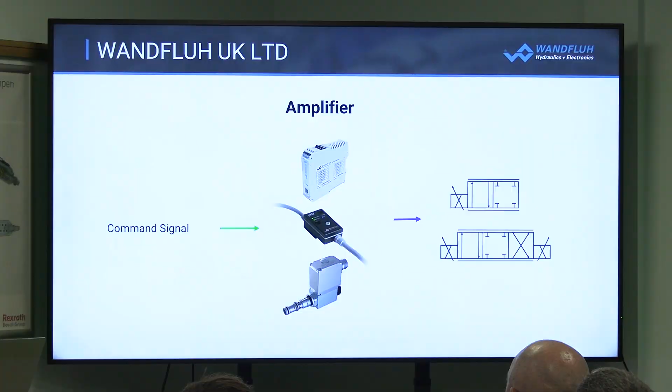So amplifiers do what they say. They just take like a command signal. So it could be a 4 to 20 milliamp or a 0 to 10 volts, and they do some conditioning to it and then send it out to your proportional solenoids. And the amplifier will send out what's called a PWM, pulse width modulated signal. This is to actually vibrate the proportional valve. So most proportional valves are vibrated to overcome the stiction.

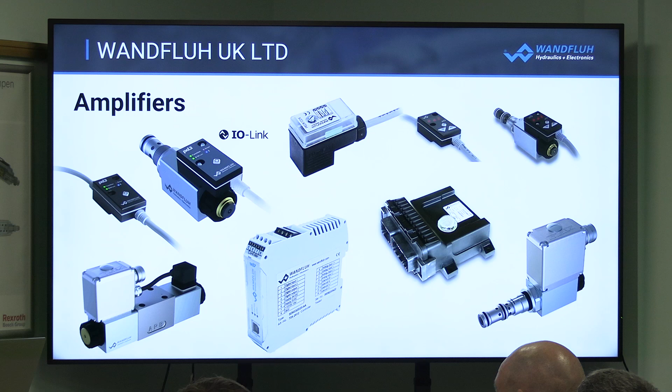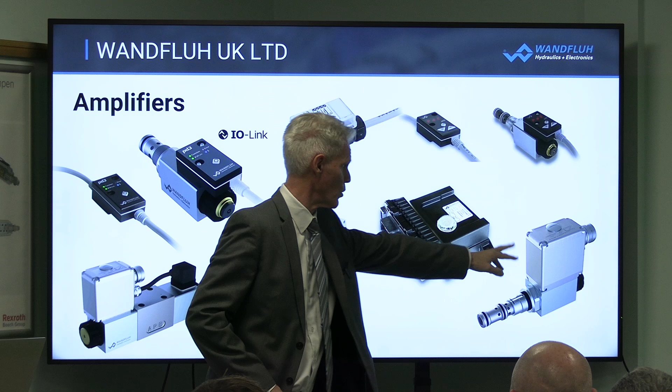So this is what hydraulic amplifiers look like. Nothing fantastic. So basically, we can have them mounted on the solenoid on the valve. We can have them freestanding, DIN rail mounted, bolted to some steel, more complicated ones on the valves.

The freestanding ones we can use to control virtually anybody's proportional valve. I've been with Wandfluh nearly 20 years, and I have not come across a proportional valve that I can't control with this range. Until tomorrow, when somebody comes up with one.

Closed loop controllers, as they say, we call them controllers, they're for closed loop control. So all this does is take a command signal coming into the electronics and compares it with a feedback signal from an actuator, for this example, and matches the two, and it will decide what it sends to the various coils on the valve.

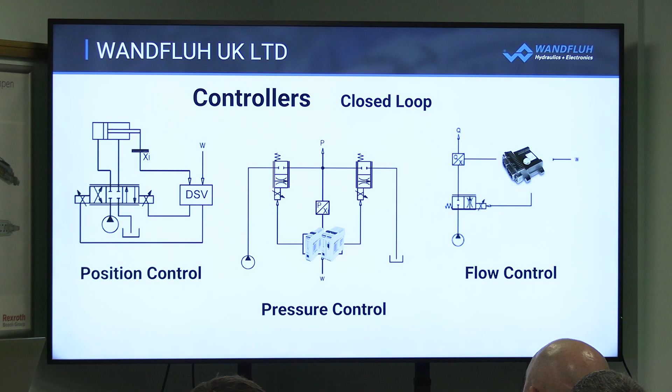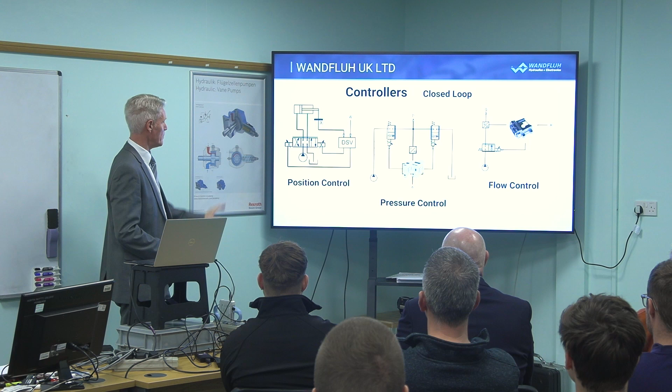You've also got, obviously, pressure control, flow control, but it has a feedback. So if a transducer, you have a flow meter, that goes back into the electronics, and that decides then what to do, so it matches the feedback to the command signal. Controllers look remarkably like amplifiers. They're all in similar sort of enclosures, but they do have the ability to put a feedback into them.

All the Wandfluh electronics, except for one, but that's an analog one, the digital ones are all based on PASO. This is a picture of the basic PASO software. You can download this from the Wandfluh website anytime you like. It's free of charge. So all this is doing is taking your command signal, putting it through conditioning, and sending it out to your solenoids.

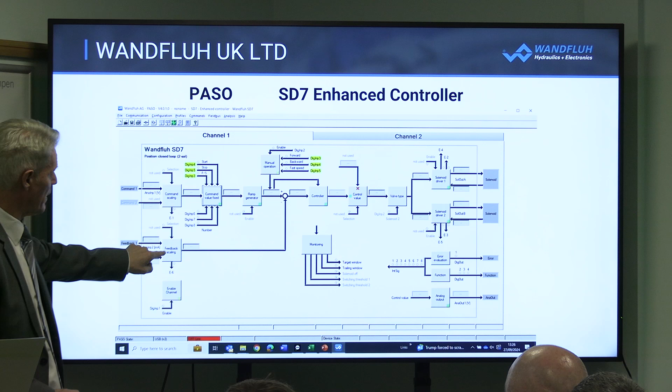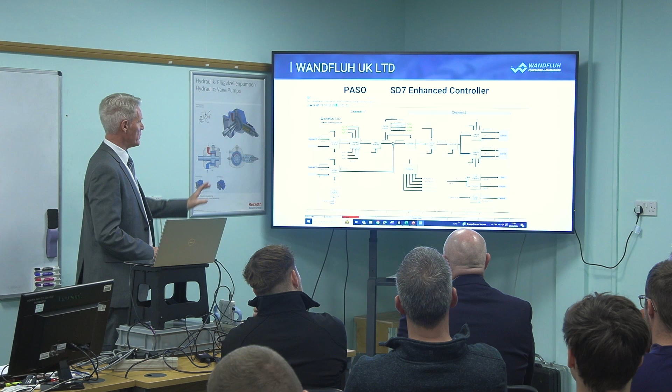And a controller does the same thing, takes your command signal, but it compares it with your feedback signal and then decides what to do about it to send it out to your various solenoids. Generally speaking, when you're using the controllers and the amplifiers, you will need a laptop to go into it, except for these ones here. So this is what we call a PD3. This is this little animal here. And you use your mobile phone for that one.

So you download the Wandfluh app, which I guess all you guys have done. Yeah? You all got the Wandfluh app? You've looked at it this morning? Yeah? Before you get out of bed? Good, I'm glad to hear it.

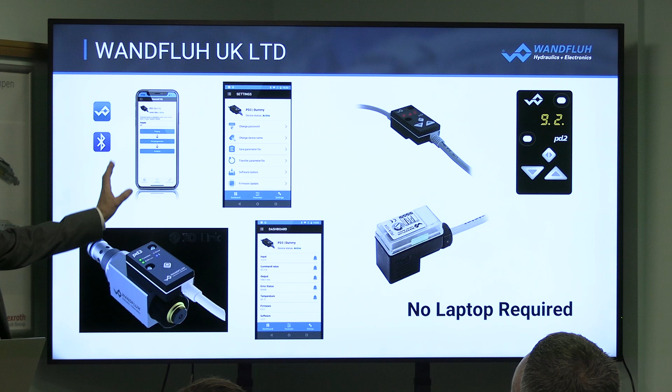You basically can connect up. This is probably the latest one we've got. So this allows you to have a look what's happening in the amplifier, and also you can change settings with the phone. The PD2 is a nice one. It just gives you a little bit of a display, so you can see what is happening with the amplifier, what signal's going into it, what signal's coming out. And for the guys that like it, this is a PO2, and this uses a screwdriver to basically change the settings.

If you've got any questions while we're going along, just ask them as we're going along.

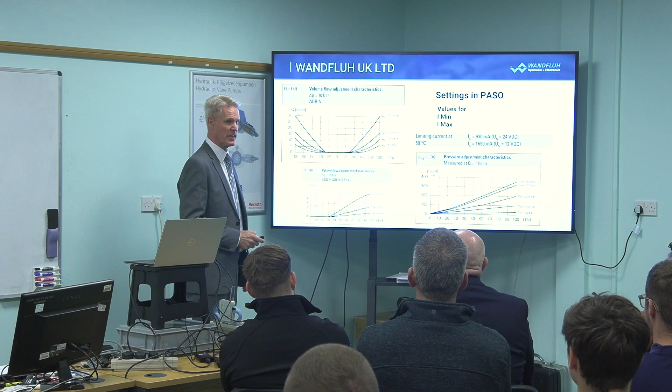So when you're looking at controlling a proportional valve, when you look at the proportional valve's data sheet, there are certain things which you need to know or need to look at. First thing is what is the maximum current going to your proportional valve. We look at what we call I min and I max. So the maximum current that we can send to this proportional valve is 930 milliamps. Proportional valves also have quite a large deadband if you're using like a directional control valve, like a 4-3 spool valve.

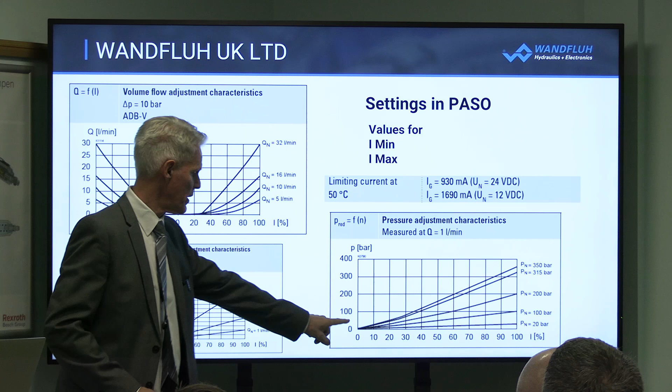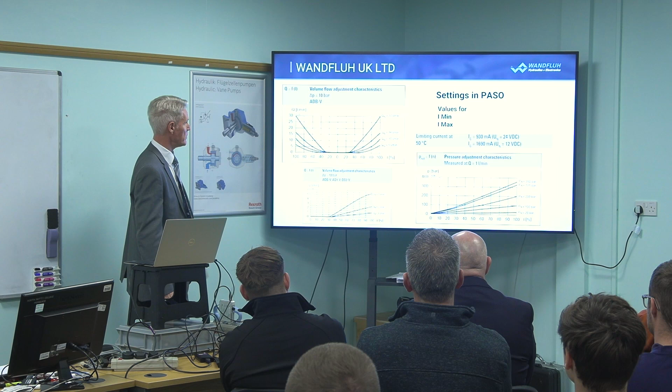So you have to move the spool so far before any flow is going to come out. So we have what's called a deadband, and we're overcoming that with the I-min setting within the PASO. If you've got like a pressure control, a pressure reducer, pressure relief valve, proportional, then there isn't such a deadband. There's very little deadband. But for directional control valves, spool valves, you have deadband. So you need to know a little bit about this before you go forward to program things.

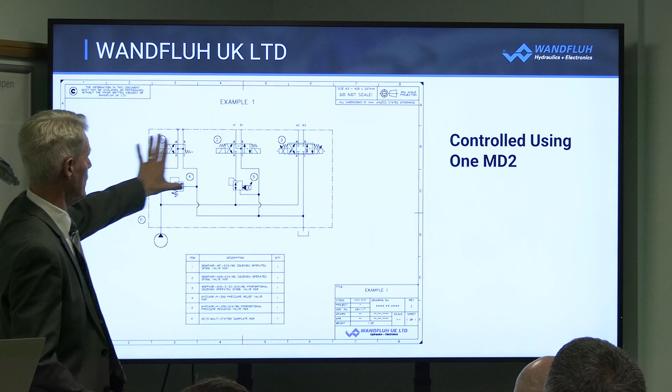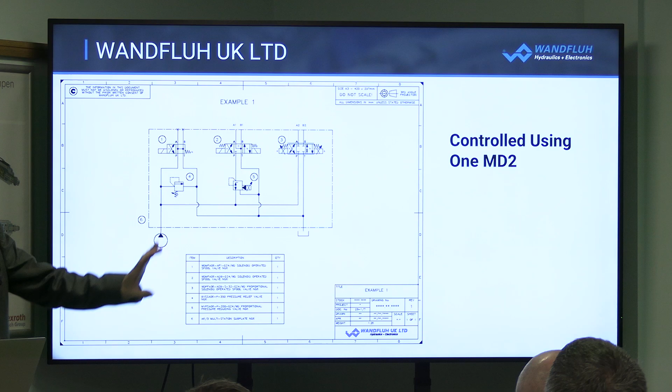Hopefully by the end of there we'll be able to go on to what we call our MD2, which is this one here. And this controls up to 8 solenoids at the same time. And so it's quite capable of interlinking a simple circuit together. So you've got a dump valve, proportional reducing valve, proportional directional control valve, and it's to link all those together. So what we're going to do is hopefully hook up to an amplifier.

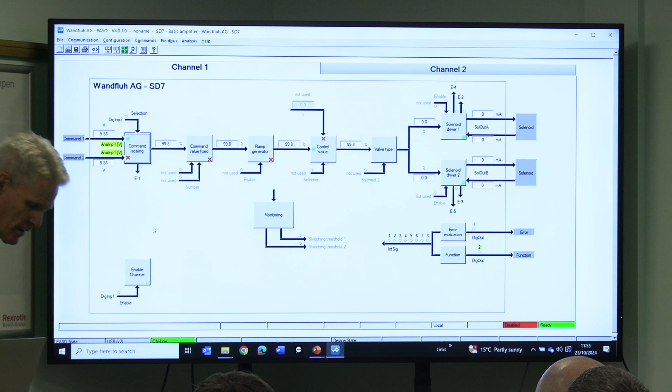As you can see from there, we haven't got 0 to 10 volts. And the reason for that is, on the demo kit, if we turn it up to the top, here's the voltage here. We don't have 10 volts. It's very rare you will have 10 volts. You'll lose something along the way. So you will scale what you have there and go into the minimum, 0.01, and you can put that in there. Now I've actually scaled that, as you can see. So I've put my 0.01 in and my 9.87, so I get minus 100% plus 100%.

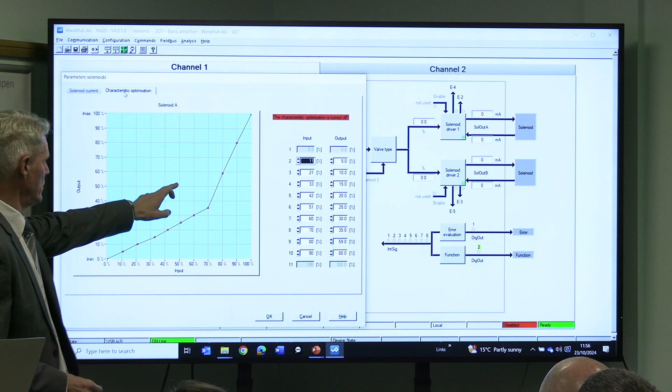Solenoids, so now we set up the solenoids. You can have them enabled or disabled, but you have to have a digital input to enable them. If you want some safety, you can invert them. You can have a cable break on there. We have a characteristic curve, so we can change the characteristics of the valve. We don't have to have 50% signal equals 50% out. We can make it more sensitive for more of the movement of the joystick, or less sensitive when we get higher, so we can actually move things quicker if we need to.

So we're going to have, for this application, it's off. So we set the Imax, which we had on the previous slide, to 930 milliamps. We need to set up the I minimum. Now the I minimum default is about 150, but you have to look at the actuator. So if it's moving a cylinder, you have to be looking at the actuator and increase or move the input signal to the coil.

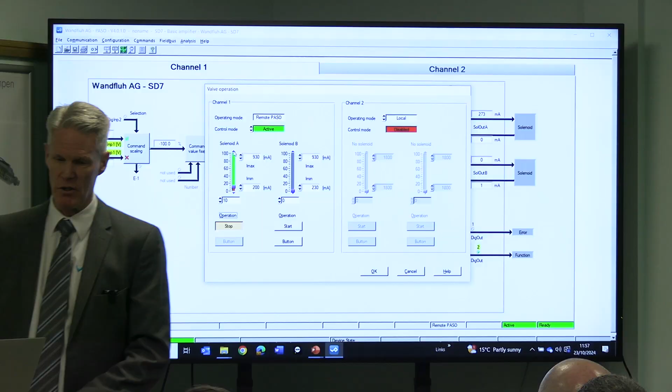You don't need anybody to do that here. You can do it using the software. So you can take it over and you can increase. So if you look at just over here, what you're doing is you're increasing or decreasing the milliamps to the coil in steps. When you see the actuator move, you've overcome the deadband.

So decide how much you've overcome it and put in the value, so that when you actuate this solenoid, it'll jump over that deadband and then start to work. So you're not having to move your joystick, and then it works. It'll move instantly from your joystick. And you can do the same for the other side as well, for the B solenoid.

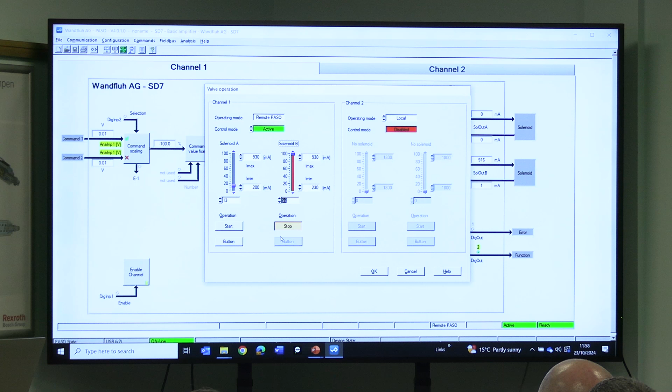As you can see there, well, we've shot up to the maximum amount. Lack of control of the mouse. And come out of that.

So you then put the I minimum for both. The I minimum will not be the same for the A and B solenoid. No two, well, I've not found it yet anyway, that they're exactly the same both ways. Everybody okay with that? Bashing along at quite a pace, right?

We also have a dither, the superimposed dither. We give a 1,000 hertz pulse width modulated signal out to the valve as standard, and then we can superimpose a dither. If you have lazy solenoids, you basically have a low hertz, high amplitude, therefore you'll give the valve a bit more of a shaking, make it work, and vice versa. And in some systems, you need to be able to play about with it.

Nine out of 10, that's it. We're off, we're working. And then you'll get some people ring up and they've got this problem, that problem. So one of the things you're going to get is, oh, it's not very stable. You know, it's the cylinder oscillating around, messing about. So you will come on and you'll go into PASO and you may check the voltage and you might see it just flickering a little bit. But the way it is, it's not that sensitive, so you can't see it very much.

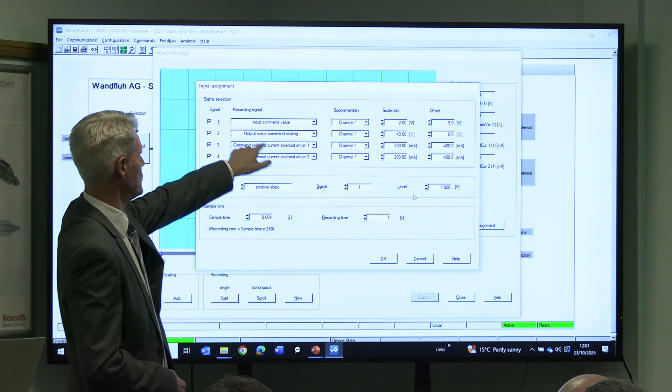So what we have is an oscilloscope, and we can set up what we want to look at on the oscilloscope, so we can look at the command input value. And with all oscilloscopes, you need a trigger point. We're going to take a reading of 0.004 of a second, so we're going to see noise coming in from the command signal.

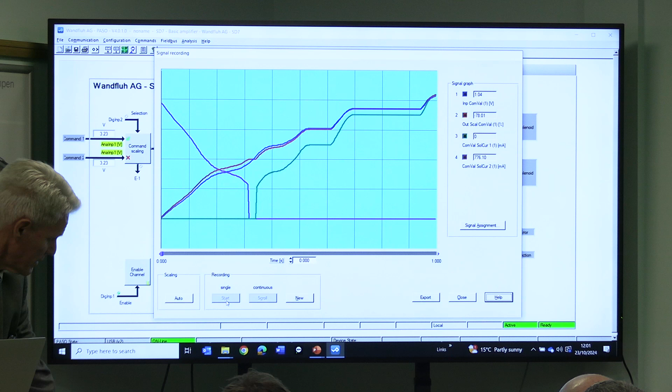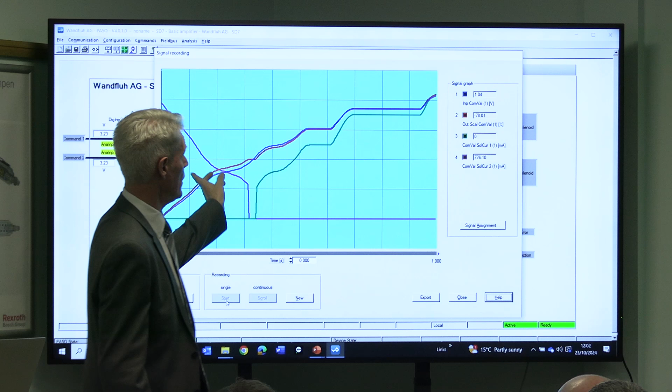So, right, start. So I've got to get past my trigger. And you'll be able to see, I mean, you can't see it very well because it's so quick. But you can see here that the green is your solenoid, and you probably see that doing this because it's unstable. And you can see blue is the command signal, and you'll see that oscillating around. So you know that your command signal is oscillating.

Depending how bad it is, what we can do about it. I have been on site, and I have had a command signal wire coming past a big AC motor, and yes, the command signal is very unstable because it just picks up. So yeah, everything is unstable. We've got a couple of things we can do.

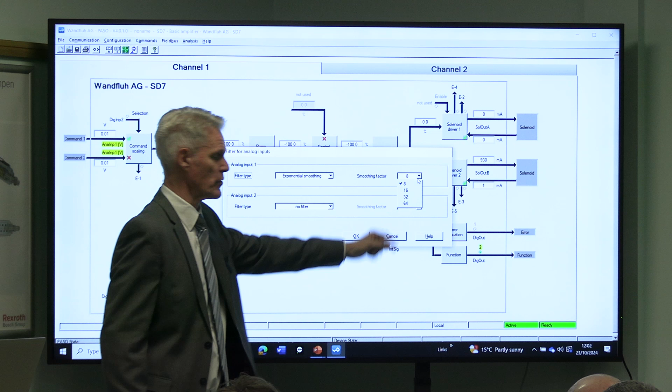You can ask them to do a better wiring job. Good luck with that. Or we can put a filter on. So effectively we've got a range of filters. Obviously 64 is higher than the one, so we can actually take out noise. So if it's got a bit of noise on it, we can deal with it using the SD7.

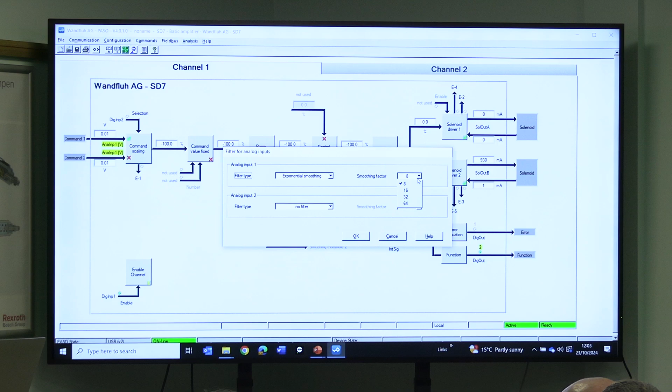What's the downfall? Sorry? What is the downfall of putting that on? It's not quite as sensitive. But in an amplifier using a joystick, it's not that sensitive. You're not going to see it. But yes, it does take a little bit of the sensitivity out of it, but it will calm the system down to a point.

I mean, this guy with his wire, which was running past his AC motor, there was not a chance. It wasn't screened, nothing. It was impossible. You can do lots of different things. You can monitor. That is the basic amplifier. There's a lot more features on it, a lot more things you can do with it.

This is 2 solenoids. You can use this one card to control 2 independent single solenoids, like 2 pressure reducing valves on the system. You can just use the 1 card. You will then go into channel 2 and do the same.

One other thing that we get asked for and we have used: if you're on the deck of a ship and you've got a winch, so you're bringing up whatever it is at the bottom of the sea, and you want it to come up quickly, so you've got your maximum power going to your coil, and you're winding it up as quick as you can.

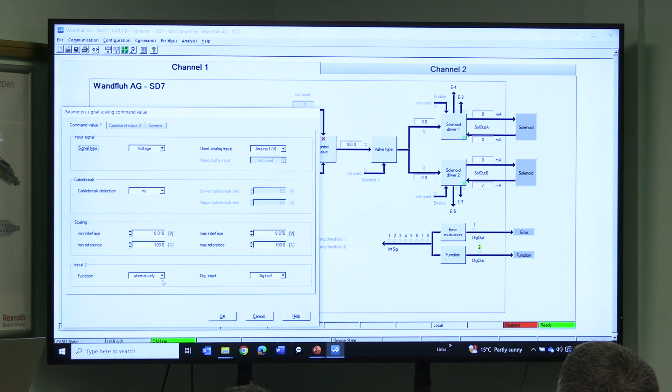But when it gets to the deck, you want to slow things down. Well, obviously you can do that by bringing the joystick in and using just a bit of the joystick. But what we can do is go into command scaling. Got to disable the card. And at the bottom here, you can see an alternative. And we're going to use digital input 2 to switch to the alternative.

So the alternative we're going to do is still use the same analog input. He's still on the same joystick. He wants it now more sensitive, so we're going to say, okay, for 0 volts, we're going to use half the signal, and for 10 volts, another half the signal. So he's at half speed, but he's using the full movement of the joystick. So at the moment, he's using full speed.

Enable the card. So he's got 930 milliamps going out to his coil. If we put digital input 2 in, we're going to switch to the slower speed, and he's now dropped to 536 milliamps. And I know that's not 50% of 930 milliamps, but it's 50% of the difference between I minimum and I maximum, plus the I minimum.

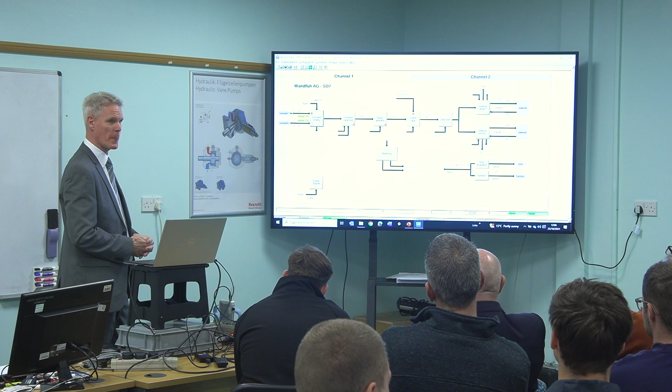Now that feature's used quite a bit, not just on winches on ships, but quite a few people use that where they want a sensitive system or they want a fast system. You can flick between the two. You okay with that, guys? So you'd have a switch on there to switch across? Yeah, switch across. So fast, slow switch, yeah.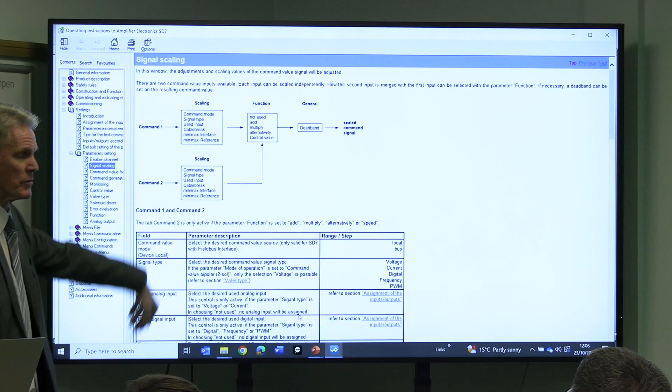There's lots of things you can do on here, so if you're in your command signal, you can always hit the help button and up comes the instruction manual to help you out.

Being a bloke, I've never read it.

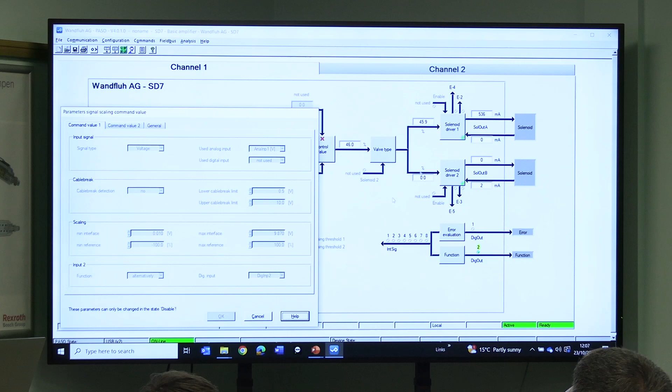Functions: at the moment we have, if solenoid 1 or 2 are active, we have a digital signal out. So if they're active, we have a digital signal out. So you can say, well, we're moving, we're doing something.

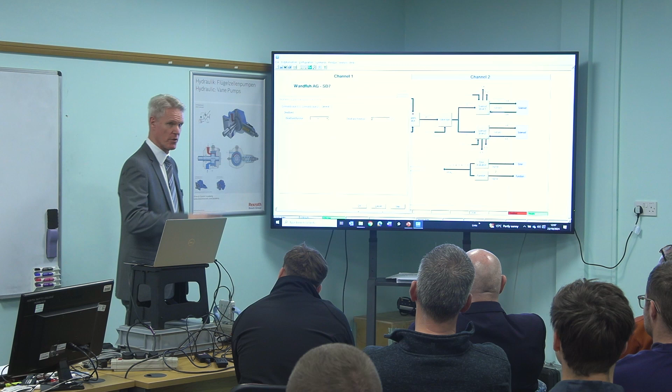Back in the, if we disable again, signal scaling, we have what's called a dead band. So if you've got a joystick, at 5 volts in the middle is nothing. You're never going to get to that 5 volts because it's always going to be wavering about, moving about, jumping about. So you're always going to be flicking between the solenoids. So we put a dead band on the joystick.

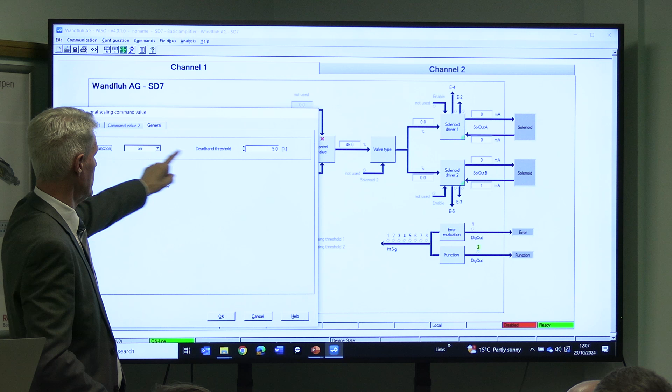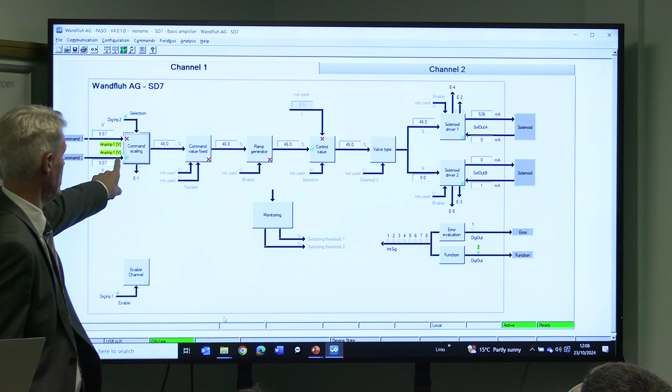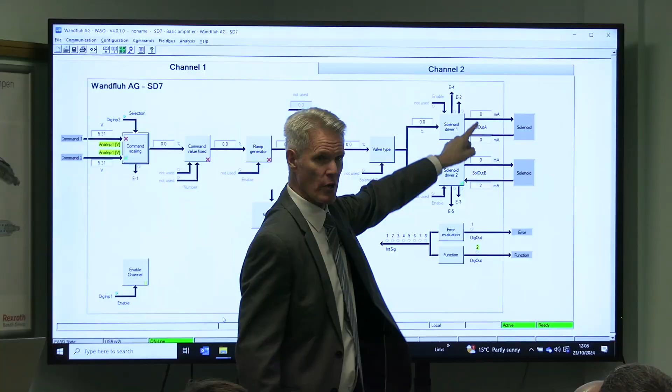So at the moment it's on and we have a 5%. So when you get close to 5 volts, it's going to go off. So if we look on, we're on the slow speed, we're at 9.8. So if we come down to 5 volts, if you can see now we're at 5.31, but we've knocked off the coils. Right, so that's the basic amplifier.

Any questions on that? We're okay with that? Yeah, all happy to use that? Good.

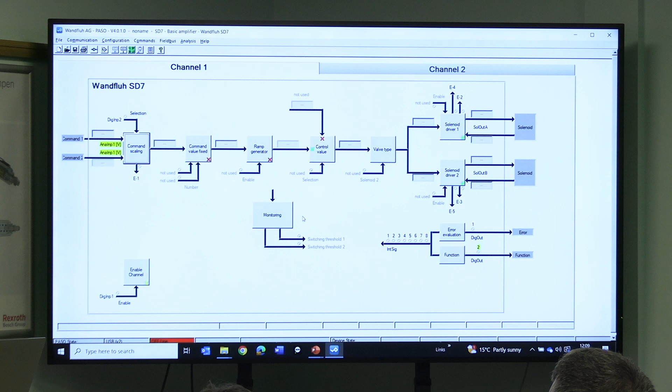So what I will do is connect up a controller. Right, so now let's say we're coming on site, we've plugged into our amplifier, we wish to connect. So we have activate online, we want to go and look at it, so we're connecting up to it. And it'll give you a choice.

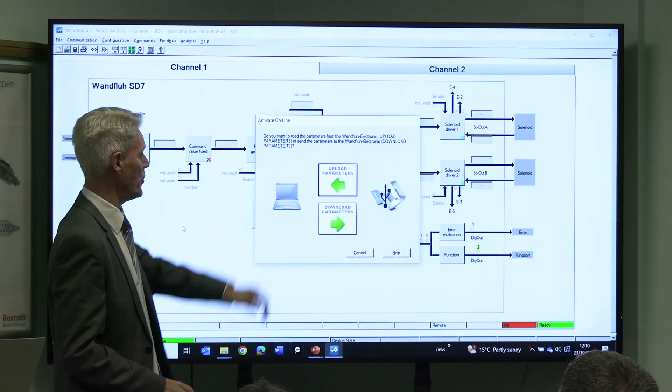So you can either send down a program from your laptop, so if you've got quite a few SD7s of all the same programs, similar programs, you can just send it all down, or you can have a look at what's on the SD7. So we're going to have a look at what's on the SD7.

So this is a controller. So basically you have the same command signal, but now you have a feedback signal. And what the valve is going to do is compare the two and operate accordingly. But once again, you've got to select what you want to do. So with a controller, you can use the controller as just an amplifier if you wanted to, that's fine.

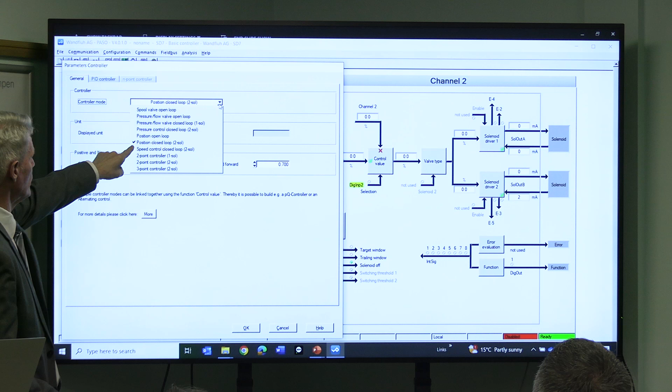But again, we're going to go for position, closed loop, 2 solenoids. So again, we're going to use the 4-3 proportional spool valve, and we're going to control a cylinder. So we select position, closed loop, 2 solenoids. It's going to adapt it. With the valve type, you now have no choice. It knows it's going to be a 2-solenoid valve. It's going to use unipolar. It's going to sort itself out.

Now the ramp generator is now a little bit different, because now you can set the maximum speeds you want the cylinder to move, the maximum ramp up. Ramps will ramp up as you travel out, ramp down, and when you come back, this is the minus, so acceleration back and forth. So you can have all different values. So this is quite slow. The speed is 10 millimeters per second. But you can set it up there how you want to do it.

So if you've got a big load where you're pushing something out, you want to go slow out. When you've dumped the load the other end, you want to come back quick. So you can change those settings in there, out and in. Command fixed value, the same again. You can decide, but in this case, you're not deciding on the speed, you're setting how many millimeters you want the cylinder to go out.

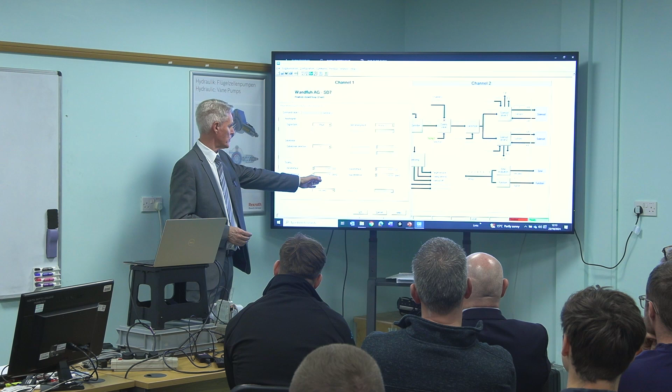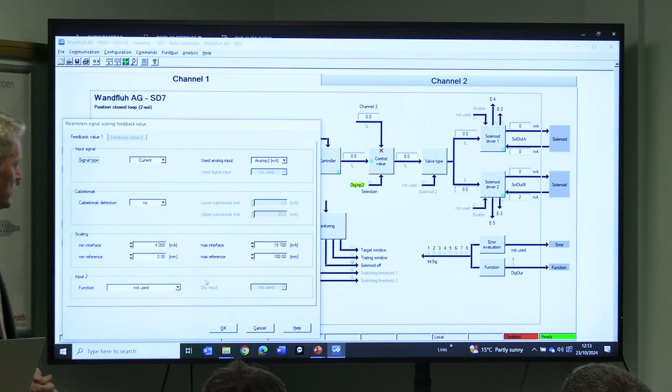So on the scaling, we've now got a command signal of 0 to 9.88 volts. We've decided we want 100 millimeters of travel. So we have the reference at 0 millimeters and the maximum voltage you're going to give the command signal at 100 millimeters. With the feedback, we want to use 0 to 100 millimeters. Typically you have a 4 to 20 milliamp feedback signal from the transducer.

You don't have to have a 100 millimeter stroke cylinder. So you could have a 120 millimeter stroke, whatever else you want to do. You can use the manual sliders, which I showed you earlier on the amplifier, to move the cylinder into position. And what you're looking at is when you are in position, taking a reading.

So the cylinder might be stuck out 12.5 millimeters and it's a 6 milliamp signal, but that's where you want to start. That's your 0 millimeters. So you can put in here your minimum interface, 0 millimeters, 6 milliamps. And then when you extend your 100 millimeters that you want to be at, you will see the milliamp again on the feedback.

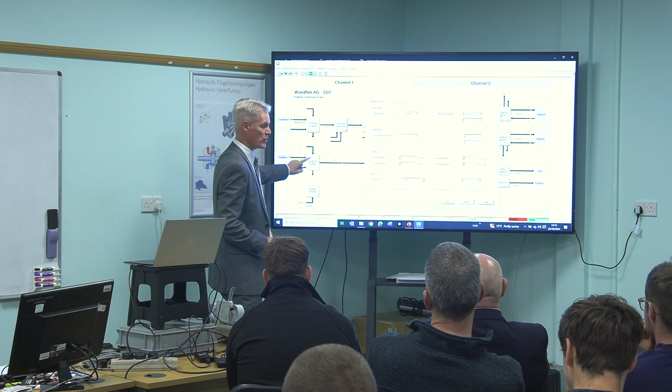If you have a 100 millimeter stroke cylinder and you're going from one end to the other, when you fully retract the cylinder and you've got a 4 to 20 milliamp transducer, you aren't going to get 4 milliamps. It'll be 4 point something or 5 or something like that. So this is when you scale it in here. And when you fully extend it, you might have 18.2 milliamps. Scale it in your feedback. So then when you do your command signal, you're matching exactly where you want to go.

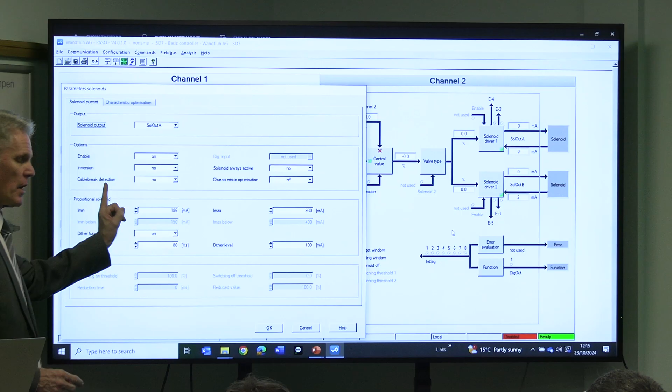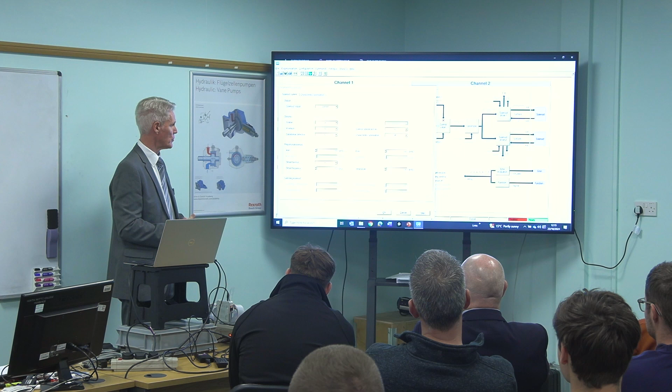Setting up the solenoid is pretty well the same as we did with the amplifier, except this I minimum becomes a lot more important to get right, so that the solenoid valve doesn't have any dead band at all. It's straight over, straight back. That can have quite an effect on the performance of the system.

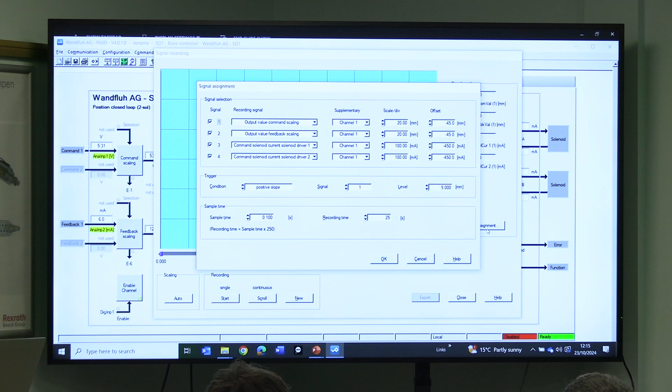When you're doing closed loop, you can set up what's my output signal scaling. This means a command signal for millimeters, output feedback in millimeters, and you want to know the power going to each of the solenoids.

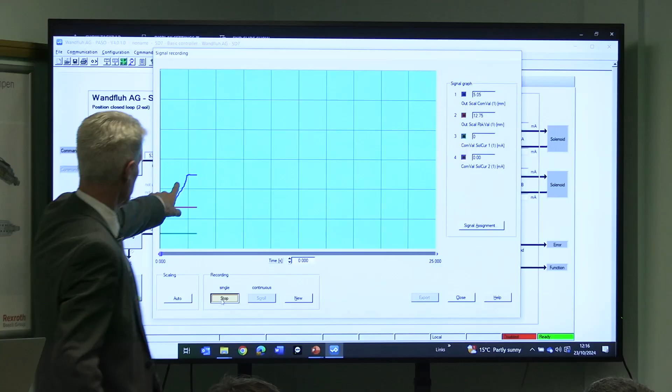When you're doing closed loop, this oscilloscope is absolutely golden. It helps out big time because you can see where you are and how you're matching things up. So if we start, you can see the blue line is my command signal and the red line is my feedback, and you can see it matching up, something like this.

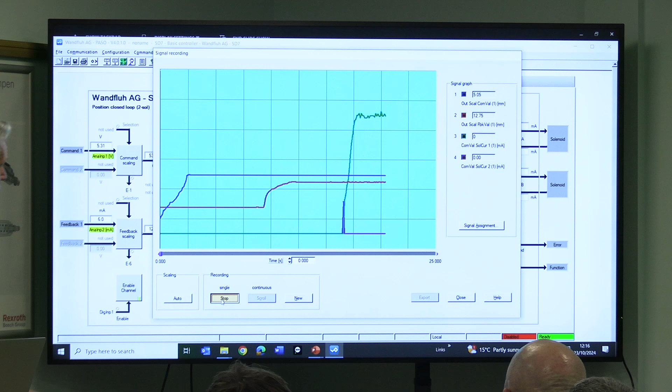Enable the card and it would work. Green is the solenoid. So the solenoid has reached as much as it's going to reach in terms of milliamps out, but we've still got this, we're not there.

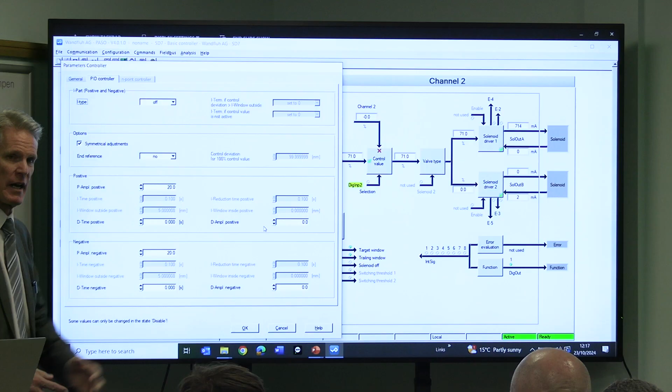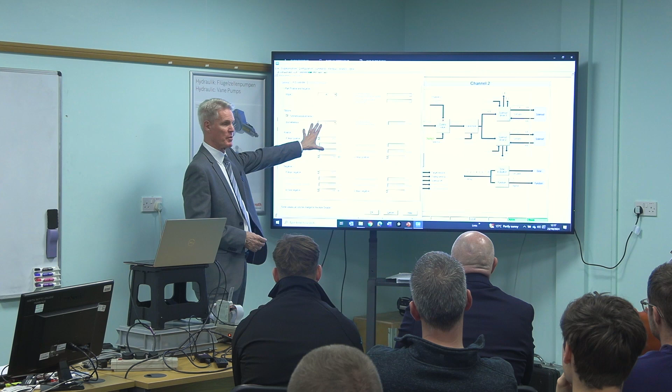So within the controller you have PID loops, so you can play about with the amount of amplifier amplitude you get into the valve until you get it as close as you can. Sometimes it overshoots, so we have an integrator you can use. There's quite a lot of tools in the PID integrator to make the valve perform exactly as you want.

What you're trying to do is, so we'll scroll this time just so you can see. When we're below the feedback, we have solenoid B. When we're above it, we go solenoid A to try and bring up the feedback signal.

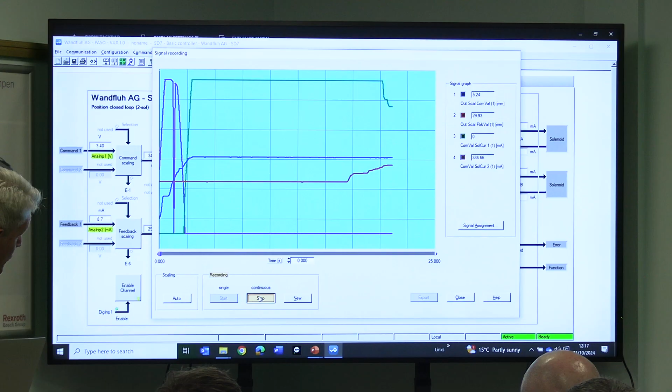So if the feedback signal comes up, we see the green solenoids coming down in value. And then when we get pretty spot on, you'll see both solenoids here I've got set so they both go off. We're in position, we go off.

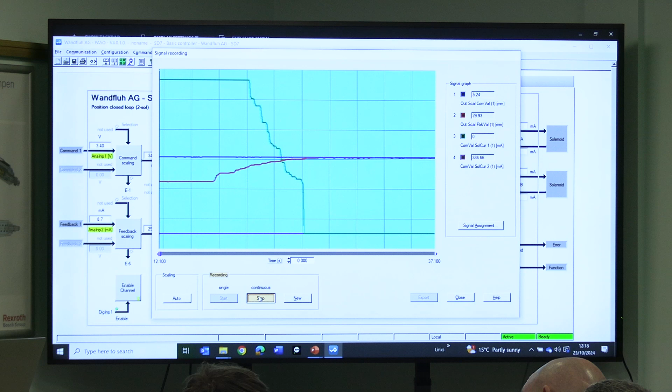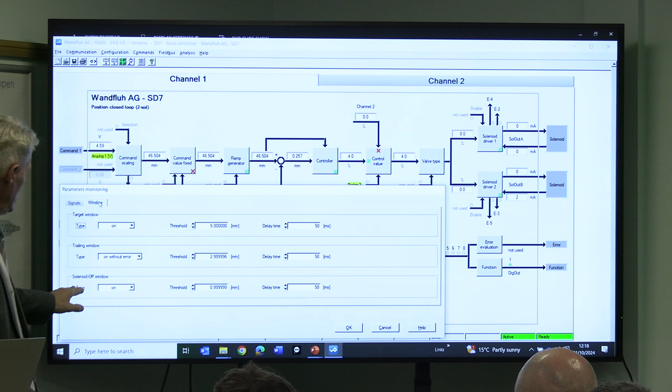You can set up monitoring as well, so we can set up a signal out. When you get within your target window, I've got 5 millimeters here, it could be 0.5 millimeter, and we can have a trailing window. This is just a light on the SD7 to say we're within 3 millimeters, but when we get within 1 millimeter, we'll turn the solenoids off.

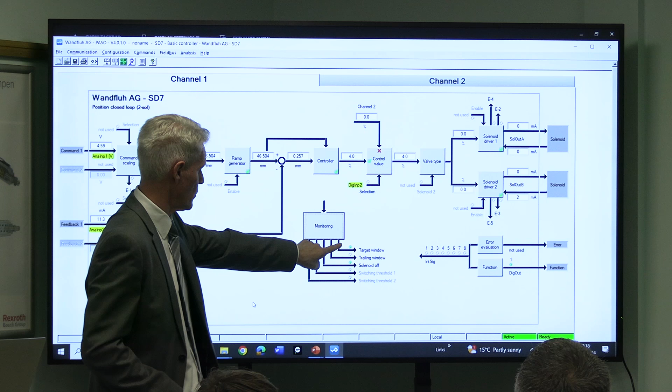So the system will still work even though we're in the target window, it'll still try and get closer. So these are them here. We've reached target window, solenoid is off. If we come out, so now we are out of target window and we're out of the trailing window.

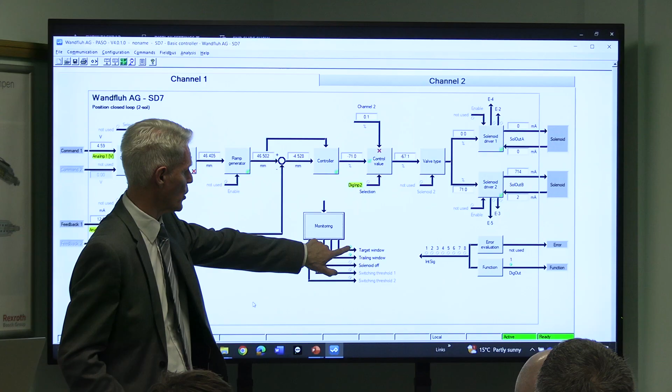Get back again. So now we are within target window, 5 millimeters, but we're not within 3 millimeters. It's so you don't have to keep looking at the two values and trying to work out where it's flicking about. And then when you get within, your solenoids are off, you're in target window, you are 0.5 millimeter out.

On the enhanced amplifier, I control cylinders to 0.1 millimeter or less position control. Depends on the application, depends on what you're doing, but we can get very good accuracy.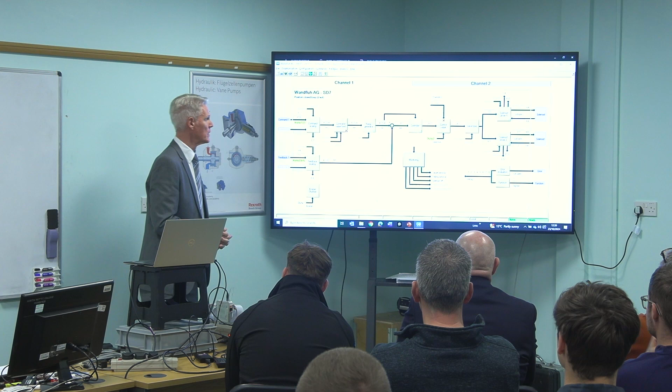One thing you need to be aware of when looking at digital controllers is their bit value. A basic controller is 10-bit, so that's 2 to the power of 10, giving you 1,000 divisions. So if you have, for example, a 5-meter cylinder and want to be plus or minus 1 mil, it isn't going to do it, it hasn't got enough divisions. You're only going to get plus or minus 10 millimeters with 1,000 divisions. So you go up to an enhanced controller, which has 16 bits, and that's more than enough.

Any questions? Anything else you'd like to know about a controller? No? Good. Means I'm really good at what I'm doing then. Is that right?

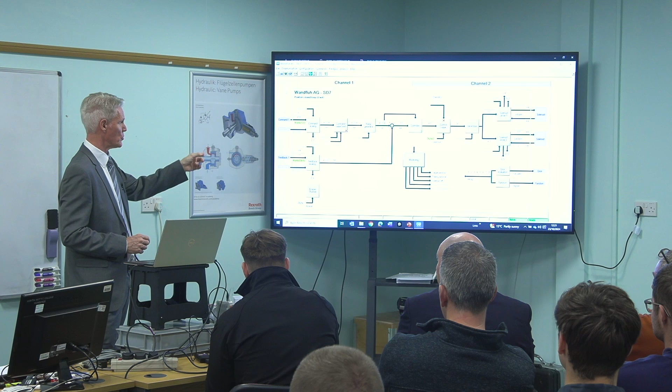Okay, so what we'll do now is, we've got a little hydraulic circuit which Greg's going to give you out, so we can control a basic hydraulic circuit which you saw on the board using an MD2.

So basically, if you've got a simple power unit with a few valves on it, a couple of proportional valves, a couple of directional valves, a dump valve, then you can use one of these, an MD2, 8 solenoids. It's IP67. The heat sinks are on the back, so just bolt it to some steel somewhere, and that's it. It'll look after everything.

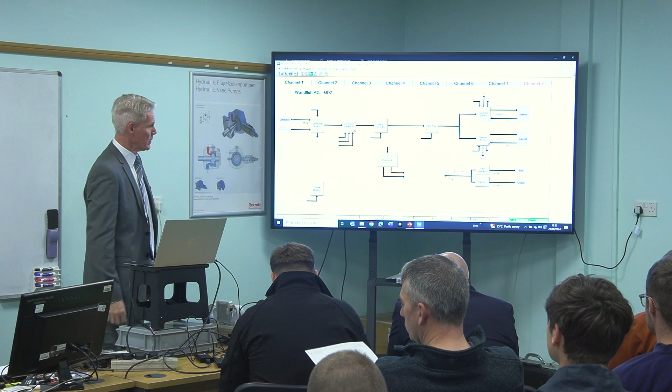So if you look on the picture there, you've got on the right-hand side the dump valve with the relief valve under it. So the dump valve, when you want to do something, you need to energize the dump valve. So what we have here, we have an internal signal. When we get an internal signal, then the dump valve will come on.

We have digital inputs to control the solenoids, which is item 2, just the bang bang valve. What we do have with this, as well as all the proportional stuff, we're going to switch a solenoid on and off. Piece of cake, not a problem. If you hit digital input 1 in this case, the solenoid comes on, and after 2 seconds we reduce the power to 50%, so now the solenoid isn't going to get too hot. But if we look at channel 1, we've also energized the dump valve. Once again, we've dropped to 50%. That's the difference between being able to hold a solenoid or being able to fry an egg on it.

So dropping them down to half power helps a lot with the heat. But what it is, you've selected a function, your dump valves come on. We're now going to look at the proportional pressure reducing valve, and as you can see, you use an analog input.

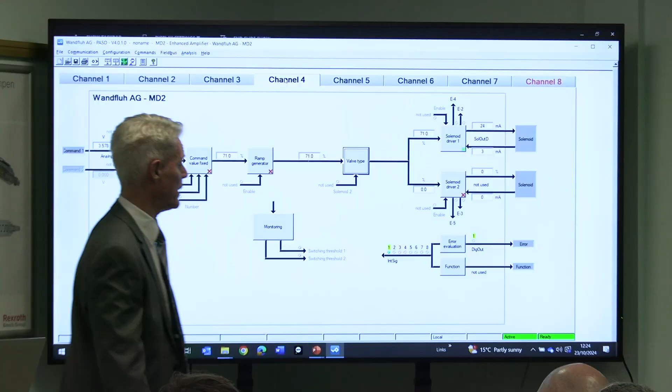So here we have the voltage going in. For this demo unit, for some reason, it doesn't tell you what the milliamps are going out. As with the SD7s and the MD2s, the MD2 gives out a stabilized 5-volt signal, so you can take that, put it around your pot or your joystick, and send it back into the MD2. So you don't have to generate a command signal. It'll just do it through whatever pot you want, or a joystick.

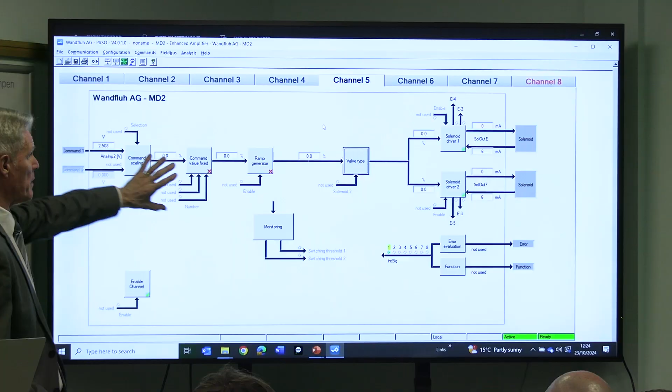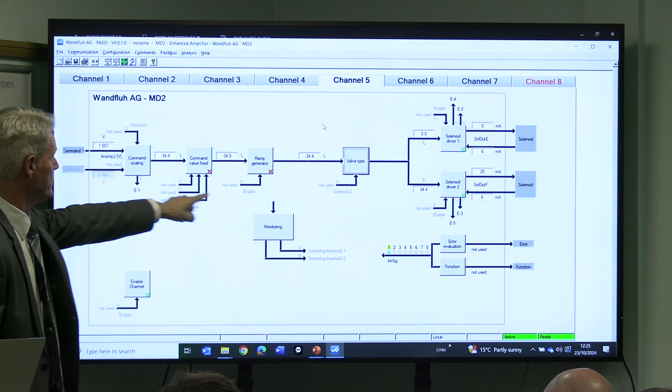So you've energized the valve, you've got some pressure, you move the cylinder to where it wants to go, or you've got something pressed, and then you bring in, on the right-hand side there, a proportional valve. Once again, we've got the dead band on it, so we're at 2.5 volts, and we can send the cylinder out, or we can send the cylinder back. So you can do that.

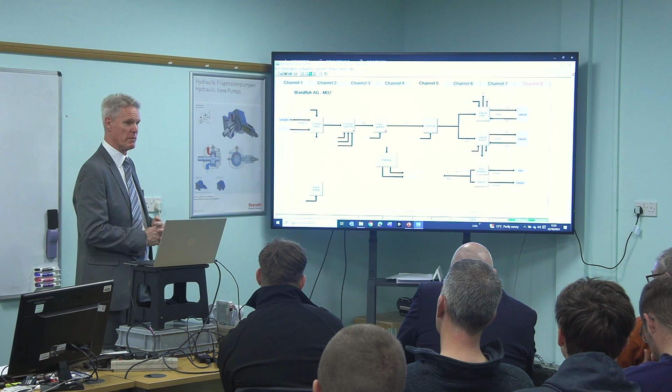I'm a hydraulics engineer. I can program this up. I don't need some electrical guy to come and bamboozle me with some software or whatever else. It's done, you can set it up. So you can have 8 solenoids. The 2 proportional valves, you can close loop them because you've got enough inputs on an MD2 to do it. So basically, from this, you've got the switching of the valves, reducing the power, so you reduce the heat. You've also got the proportional valves, so this does it all.

So you can have just a little panel, switching the solenoids on and off, increasing, decreasing, looking at whatever you want to do, closed looping it or looking at a pressure gauge.

Any questions on that, guys?

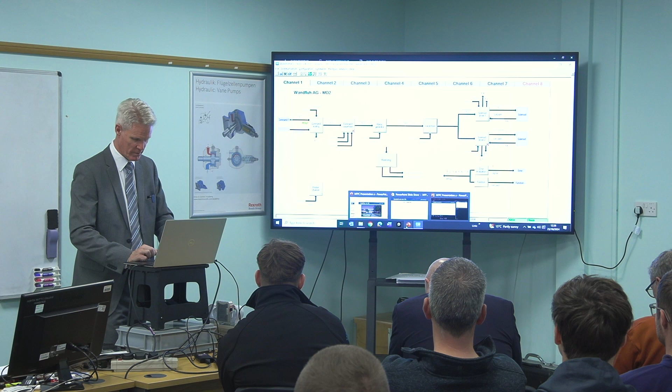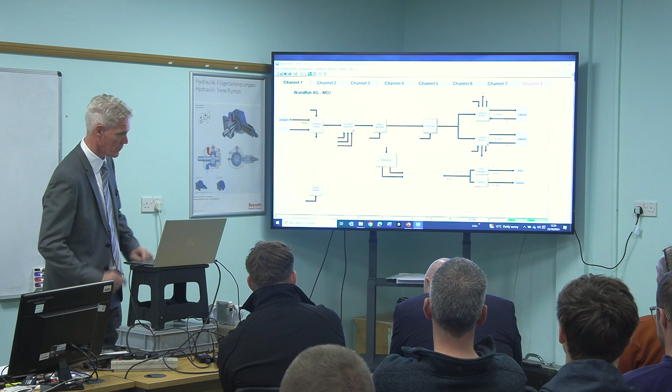Right, let's get back to the presentation. Right, where's my pointer?

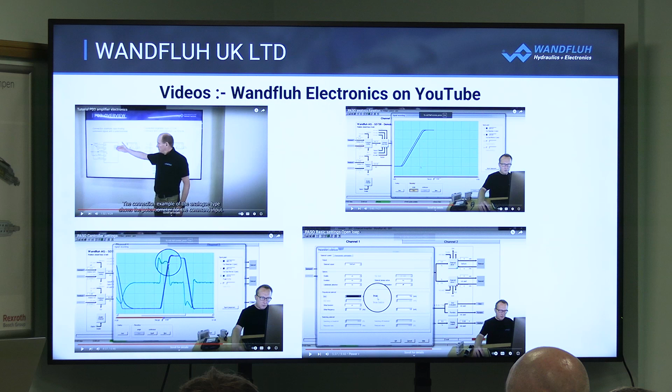However, when they set the program up, it works perfectly. In the field, it doesn't quite go that well. You might have to mess about a bit more. Okay?